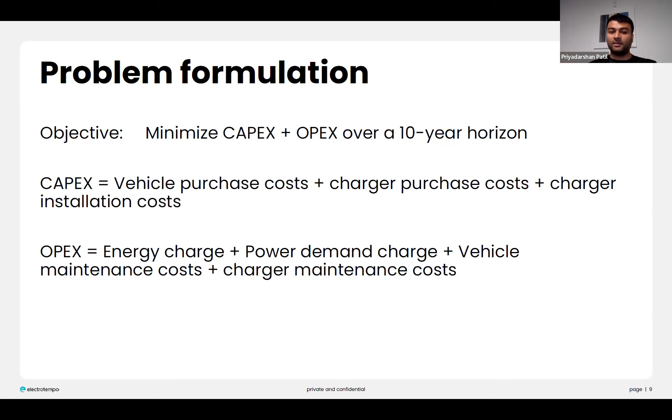Now, talking about the optimization formulation at a specific cost center, we are looking at minimizing capex and opex over a 10 or 12-year horizon, because that's the average lifetime of a vehicle. Capex is vehicle purchase cost, charger purchase cost, charger installation cost, or any kind of equipment that needs to be installed to support these chargers. And opex is your energy charge, power demand charge, vehicle maintenance cost, and charger maintenance costs.

These are some of the constraints. I didn't type out the math, but they want their vehicles to remain within a specified range of charge, or they must charge according to charger charge rates. Vehicles can either be in use, charging, or idle, and can only charge at one charger. Chargers can supply up to their maximum rating, and a few others.

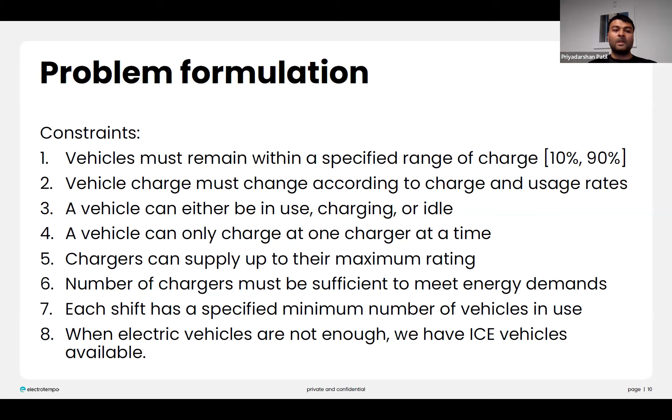Now, where is the complexity? It seems like a straightforward optimization problem. You're just trying to do some vehicle sizing and charger sizing. So for a single terminal, it's pretty easy. However, the complexity comes from having to co-optimize for all the cost centers with their different schedules, with their different charging schedules, with their different requirements.

So that is where traditional solvers, or just throwing a linear program at a traditional solver for all of these cost centers, fails. That is where we have to use techniques such as relaxations for some of the constraints and trying to look at reducing problem sizes or reformulations.

Now, similarly, for on-road vehicles, trucks serve routes that are of varying length and have some time windows for their customers. And we kind of need to identify key routes that can be electrified. Currently, as I said, with the availability of equipment, it's pretty easy, because the only routes that we can electrify are driven by legislation and by availability of equipment. But as more and more equipment becomes available for on-road vehicles, then it will become a more interesting optimization problem.

Now, moving on to our second type of customers, or our second key stakeholder, that's the utility companies. Utility companies are the providers of electricity, and they have 2 main priorities. One, keep the grid stable and healthy. And the second is provide electricity, in that order. They want to care about the grid. If they cannot supply energy in order to keep the grid healthy, that is completely fine. So they need to identify where exactly the demand is originating so that they can target infrastructure accordingly. And yeah, as I said, this is the overview that I just talked about.

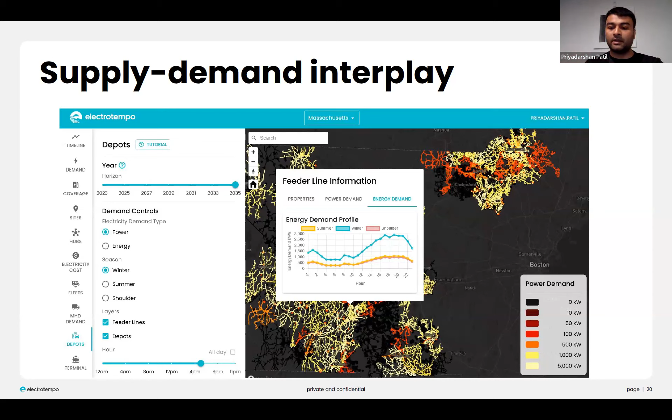That way, utility companies know, okay, the capacity of this specific feeder line is X megawatts, and the pull is Y. Is Y greater than X? Well, then you're in trouble and we need to upgrade. If not, they understand what's the spacing or safety net that they have. So this is one way of helping utilities understand where the demand is in their region and helping them walk through it.

And the last type of customer or stakeholder that I mentioned is site owners. And the biggest question that they have is, where can I install chargers? Think of it as an analog to gas stations, where gas station companies like Shell, BP are like, well, where do we put in gas stations so that we can get maximum demand? And so site owners just want to do that for electric chargers.

Now, think of this as companies like Prologis, Americold, who are massive commercial real estate owners. They have clients like Amazon, Walmart, or even smaller retailers who have trucks. And these retailers are asking, well, if we want to electrify our fleet, can you provide us chargers? And so these companies want to install chargers.

Now, at this point, I think you may be noticing a common theme here. All of these businesses have a lot of information about their domain, but they do not understand transportation. They do not understand traffic patterns. They do not understand what kind of traffic is around them or where is this demand located. And this is the same with this kind of client.

So they have two types of traffic: highway traffic, which is trucks that are passing through and stopping by. And they have local traffic that are box trucks serving the local area. Think of it as like Amazon vans, think of it as like Cortland furniture vans, and so on and so forth. Now, as I said, these clients have their own advanced analytics, but they don't understand traffic patterns.

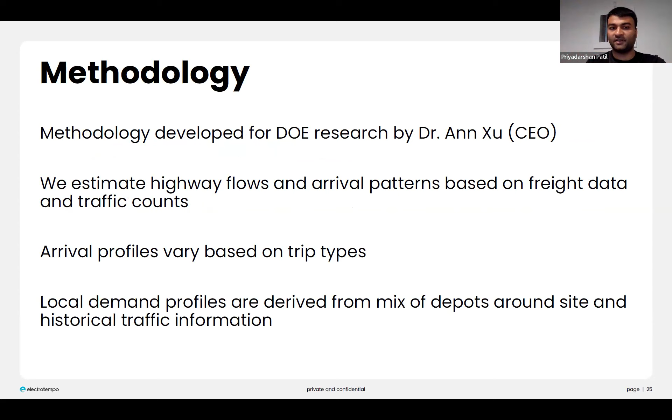Now, the methodology for predicting highway flows, and I'll go over this very quickly, was developed for the Department of Energy by our CEO. And we estimate traffic flows, basically highway flows and arrival patterns based on freight data and traffic counts. And then local demand profiles are derived from the mix of depots around any given site and historical traffic information. So let me just show you, this is one example of how we provide our customers what kind of travel profiles that we have.

So in conclusion, based on what we have seen, electrification is basically currently being driven by legislation, which then goes down to utilities, which then goes down to infrastructure, that is site owners, and then it goes down to fleet owners. Whereas the pull is being driven on the other side in the reverse. That is, fleet owners are asking infrastructure owners, who are asking utilities, who are asking legislation.

Now, all of these stakeholders, these are Fortune 500, Fortune 100 companies in many cases. They know their business, but this is the time when they need to understand traffic or insights about traffic. And there are lots of opportunities for using this traffic data and creative problem solving with just our existing transportation engineering methods. So with that, I'll stop and take questions.

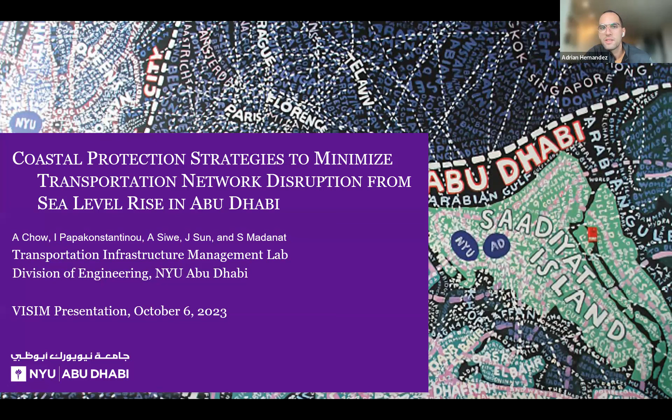Okay, thank you, Adrian. Thank you for inviting me to this talk. The title of the talk here is The Coastal Protection Strategies to Minimize Transportation Network Disruption from Sea Level Rise, using the case study of Abu Dhabi.

I want to just say that I am of a hydrodynamics background, so I am more in tune with the tidal model that I will explain in more detail. However, Ilya Papakonstantinou was really the main traffic modeler in this study.

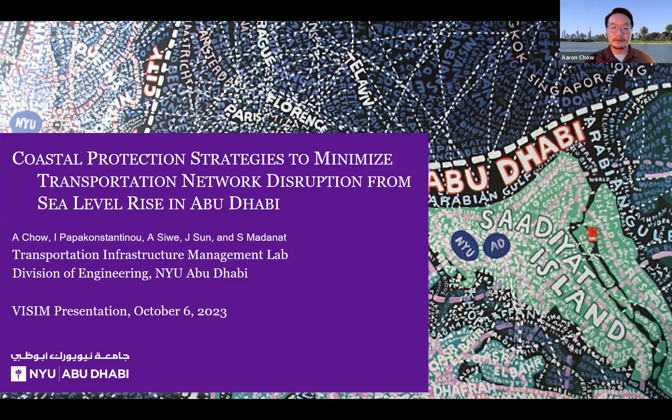With this, the prevalence of what we call nuisance or sunny day flooding is going to happen, whereby even without the storms, you see the high tide going into the coastal areas, and this is going to happen quite a lot more in the foreseeable future.

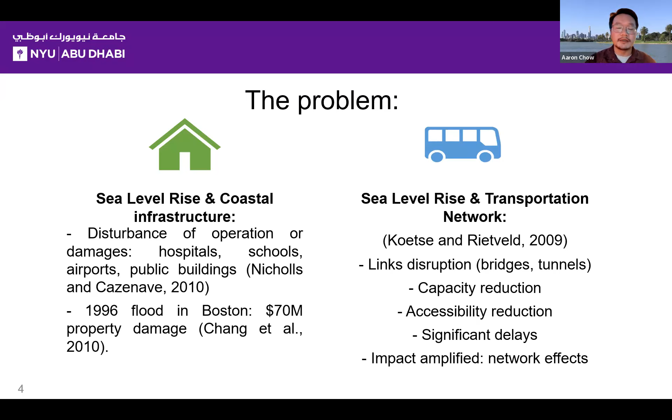So with sea level rise, the coastal infrastructure is the most vulnerable, and there's obviously a lot of disturbance of operation and damages to public buildings and such, causing tens or hundreds of millions of dollars of property damage. And then also for transportation, what happens is that the coastal links will get inundated. Then you have capacity and accessibility reduction, causing significant delays. And these are amplified well inland of a lot of these coastal areas as well.

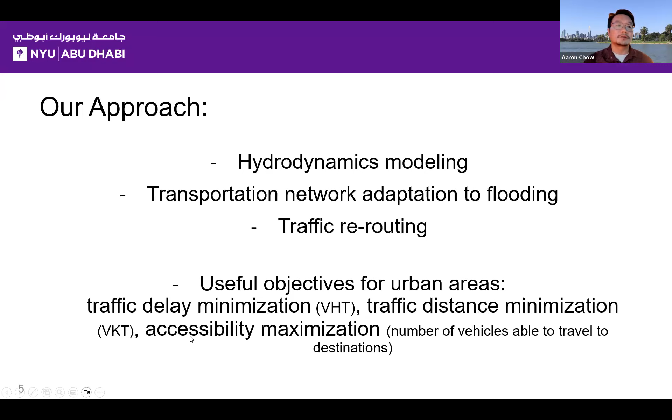So our approach really is combining my expertise, which is hydrodynamics modeling of the coastal inundation, and then we couple that with Ilya's transportation network adaptation using a route choice model, and then we come up with useful objectives for urban planning, seeing what flooded links will cause in terms of traffic delay, and we want to minimize those in terms of how to protect the coastal areas to minimize traffic delay, also minimize traffic distance, and also increase the max accessibility of the commuters.

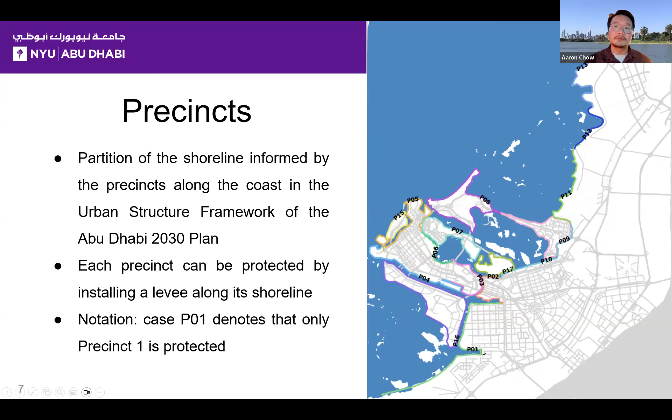What we decided to do is to split the coastline into various precincts based on the 2030 Abu Dhabi urban structure framework plan. And so then we assume that we're going to build levees or some kind of seawall to protect against any flooding in each of these precincts. And we see how each precinct protection affects the other. And so from now on, if I say P01, it means that precinct 1 here is the one that's protected.

So our process now is we're using different hydrodynamic simulation results. We look at what kind of inundation of links will happen for different types of protection scenarios of different precincts, which ones are inundated. That reduces the network that we have in the traffic model, which then changes the traffic assignment and the route choice model. And so now the aim is to identify the combinations of precincts that, when protected, lead to lower congestion levels and also maximize accessibility of the traffic network.

I'm going to explain what my contribution is, the coastal hydrodynamics model. So how do I figure out the peak flooding water level? It's the sum of three different models, actually. The first one is the tidal water levels, which is a Gulf-wide hydrodynamics model that is forced from the oceanographic and climate change data, mainly water level. Then the second is the storm surge, which uses what's called the simulating waves nearshore model, SWAN.

And then finally, you see here the storm surge will add to the tidal level, and then the wave run up, as the waves crash onto the shoreline, you have an increased wave run up. Then this is the maximum extent of your water, and those combined effects give you the peak water level.

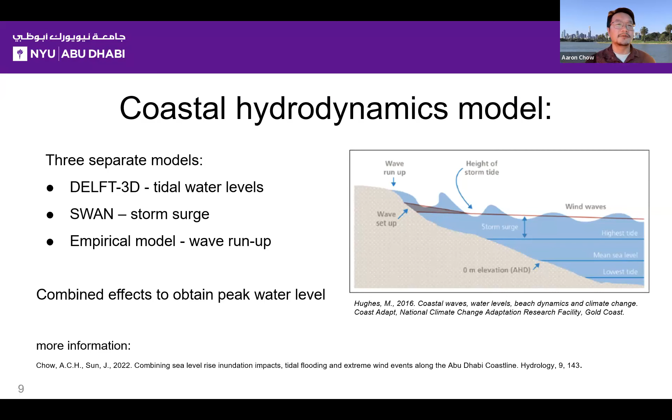0.5 meters sea level rise is kind of the intermediate level of the RCP 8.5 sea level rise that may happen between, I would say, 2050 to 2080, something like that. So that's 0.5. It's well within the observed trend of what will happen. So we put this 0.5 meters up here.

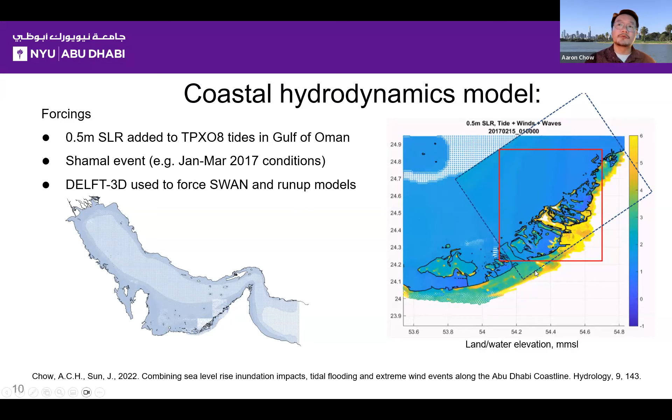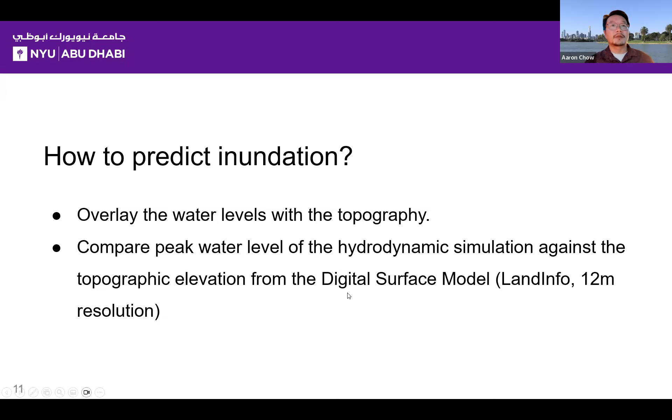So what we've chosen is to model the tidal model plus this high wind event that causes high waves. And so these two models are coupled together, as you can see on the right. And then we get the peak water levels, and we compare that with the land elevation to see which areas are flooded. Like I said here, we overlay the water levels with the topography and compare the peak water levels to figure out where the inundation is happening.

And what happens is I pass this on to Ilya. The traffic simulation, what she does is remove from the network the roads that are flooded, then use the reduced network as the input for the traffic simulation. We are fortunate to have a model that is used by the government here in Abu Dhabi, and it's called STEAM. It's based on Cube, regional strategic simulator.

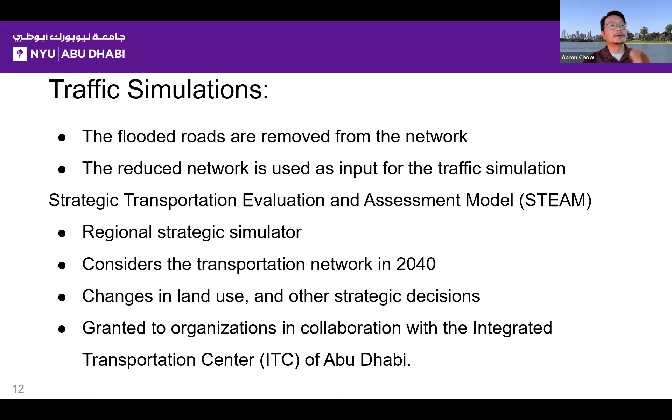It actually takes a transportation network that is anticipated in 2040. So we are using future transport network data. It also has other changes in land use and other strategic decisions coded in for the future. So we're not using past data, we're using projected data for the sea level rise as well as the projected transportation network.

As I mentioned, the different mobility metrics that we want, network-wide values, are VHT and VKT, very useful. Volume to capacity ratio is very useful to visualize congestion along the individual streets. Sorry.

And then to quantify accessibility, we use the number of vehicles in the network. Sometimes in the case of very long commutes, the commuters won't even take the trip, so then they're removed from the network.

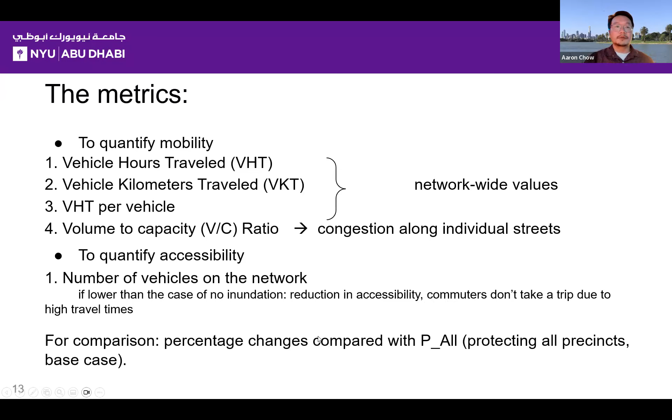Okay, so now I'm just going to show you some traffic model simulation. But before that, an interesting hydrodynamic impact is that actually if you protect the precincts, put walls around one precinct, if you go back to the map earlier, there are many islands which abut each other, and protecting one actually may harm the others. For example, the protection of precinct 1 will increase the inundated area of its neighboring precinct by 22%. So there are some interactions that are quite interesting to see hydrodynamically speaking.

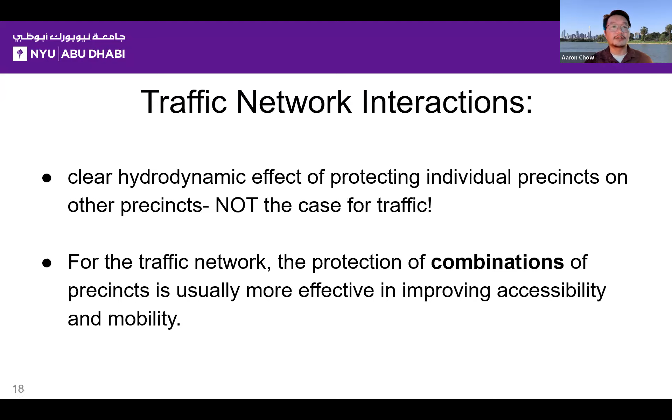Now, there is that clear hydrodynamic effect of protecting the different precincts, but that's not the case for the traffic, because you really have to look at protection of different combinations of precincts, because it really has an effect on what kind of traffic network corridors are affected by each protection scenario. With that, I'm going to show the traffic network modeling.

So here on the left-hand side, you see Abu Dhabi without any seawalls or protection, with the 0.5 sea level rise. These are the peak water levels plotted from the hydrodynamic simulation overlaid onto the traffic network. As you can see, you have a lot of flooded areas. Black links are going to be underwater. Red links are not underwater, however, they are highly congested. The white are links that are still existent and running.

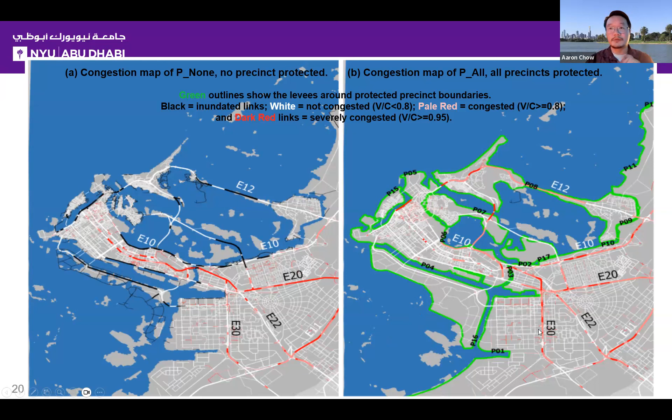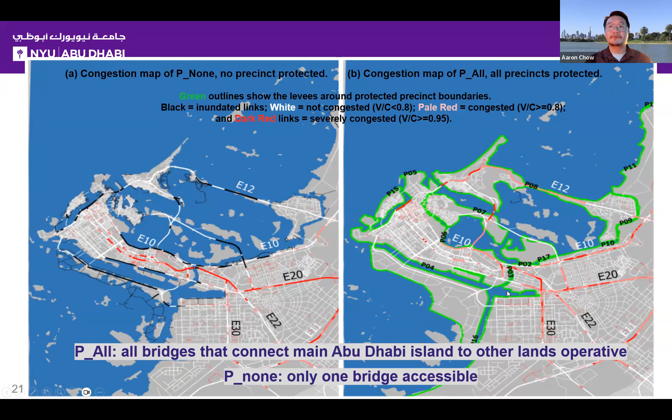And on the right-hand side, we have the case of everything being protected. There are no black links. However, there's a general congestion that you may observe during the commute. This is a morning commute. Here you see all bridges between the different islands are operative on the right-hand side, whereas that's not the case on the left-hand side. Even in the case of all protection, you have this bridge, the Sheikh Zayed bridge, which is red in any case.

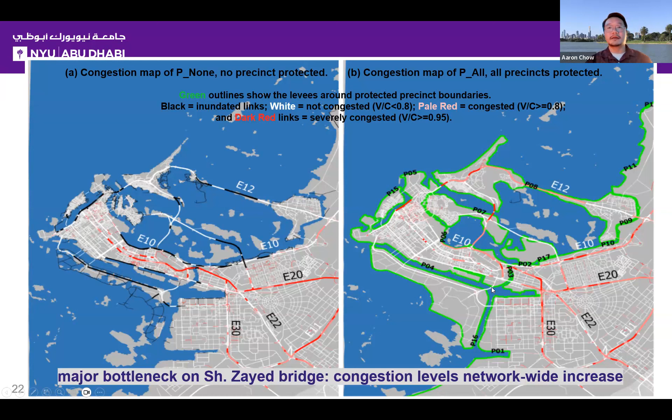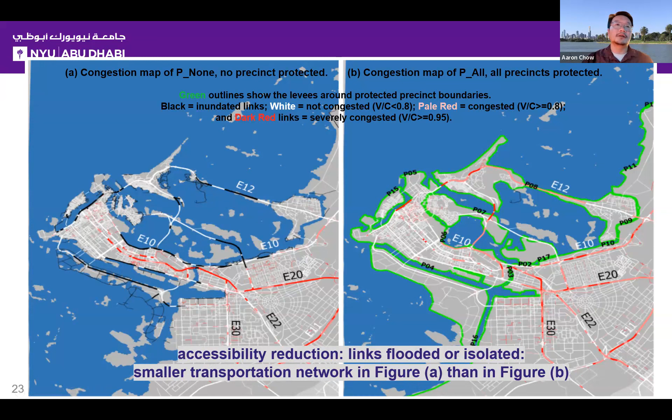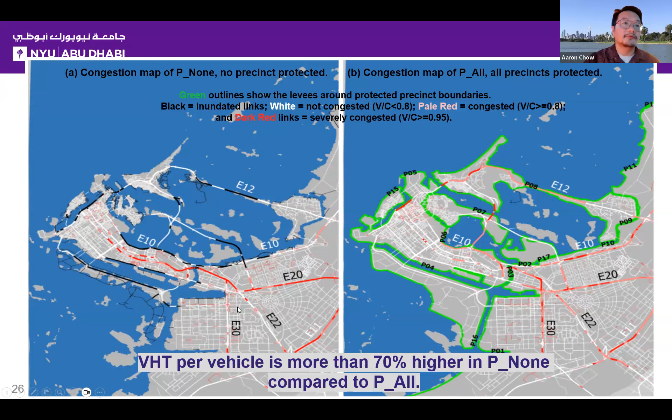On the left-hand side, you have links flooded or isolated, which are in black. Much smaller network in figure (a) on the left than the right. The number of vehicles on the left decreases by about 30%, but the network VHT is higher because you've got a lot of rerouting and congestion. And because of that, VHT per vehicle is more than 70% higher in the case of no protection.

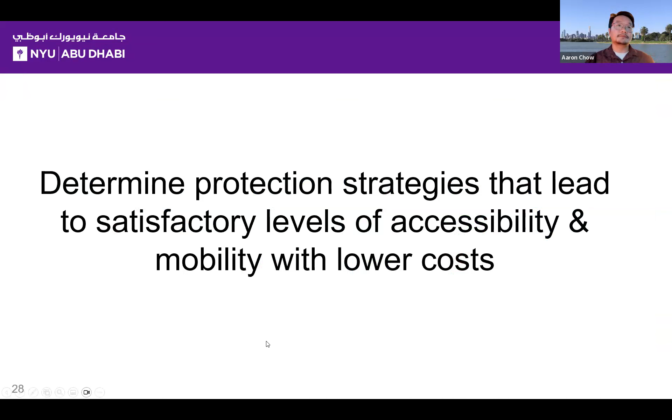Of course, the all-protected case on the right-hand side is the best case, but it's expensive to protect the entire city. So we're trying to figure out a subset of protection strategies that give us the most bang for the buck. We tried different combinations, but for the sake of time, we'll just present a few that are important and illustrative.

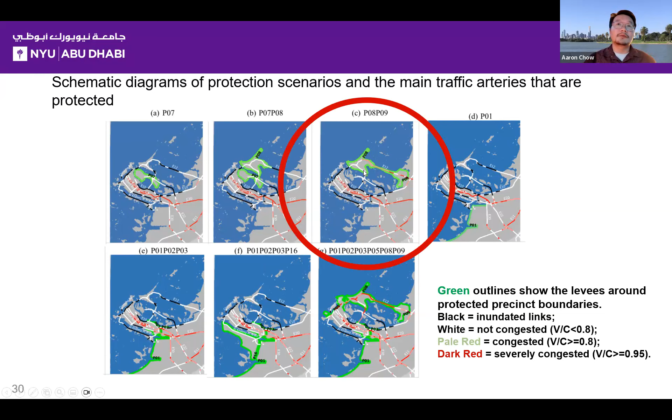This one, for example, is counterintuitive because we're protecting, we're resuming flow. We're zooming into this particular case where we're protecting these two islands. Although the traffic here is resumed, we only have one bridge connecting downtown to the mainland, which is here. And now these people on this island have to make a massive detour just to get into the downtown area.

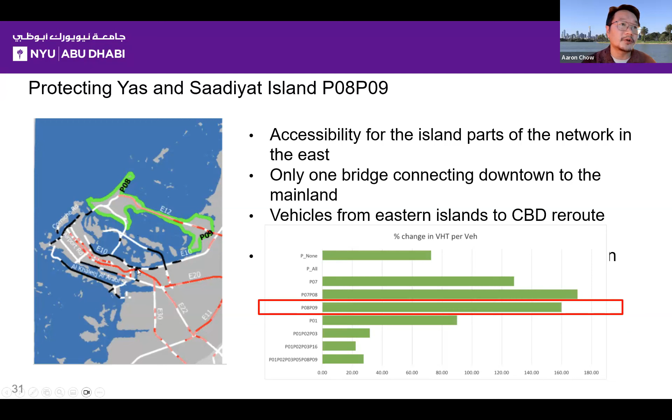So this is an example where protecting this highway and the access to the mainland here will cause the entire network to experience congestion, because you have a huge detour and you're worsening the bottleneck in this bridge.

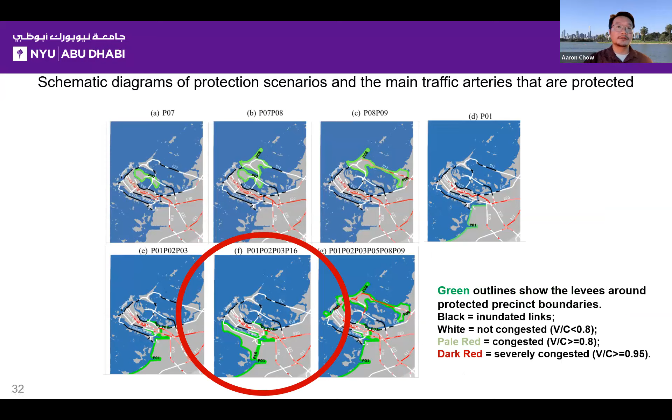Then, for the sake of brevity, I'm going to show you the best scenario, which is the one here, F. In this case, this scenario with these particular precincts protected causes 3 or 4 different bridges to be restored. And this reduces the bottleneck, and it reduces the vehicle hours per vehicle almost back to the level with everything protected.

However, what happens in the previous case is that the vehicle hours traveled per vehicle is the lowest out of all the different protection scenarios, but it's because a lot of the cars are still not back on the network. And in order to make that occur, this is the scenario that we want to use.

This is protecting the northern corridor that travels between these islands to the north of Abu Dhabi island, as well as restoring these links to the mainland. There is an increase in VHT per vehicle, almost down to the case that I showed previously. However, there's a huge improvement.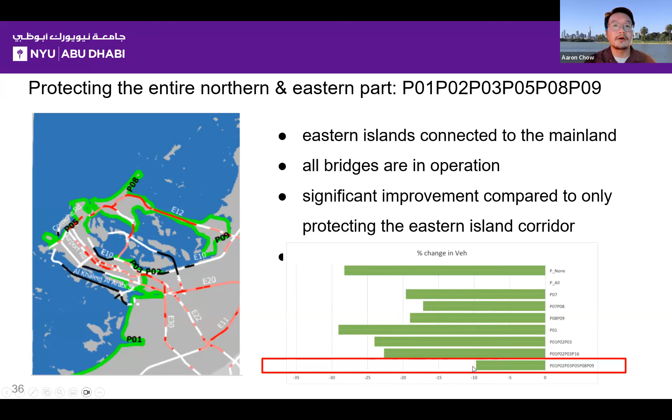Here I talk about the change in vehicles from the worst to the best, from the left to the right here. So the smaller the bar, the better it is; it's closer to the all protected scenario. And this particular protection strategy restores the most number of cars in the network, so a lot more commuters are able to travel again.

And so the conclusion from this study is that it is really critical to protect the approaches to the bridges, to really minimize all these bottlenecks between the island and the mainland. We just really want to minimize the bottlenecks. That really is the main conclusion.

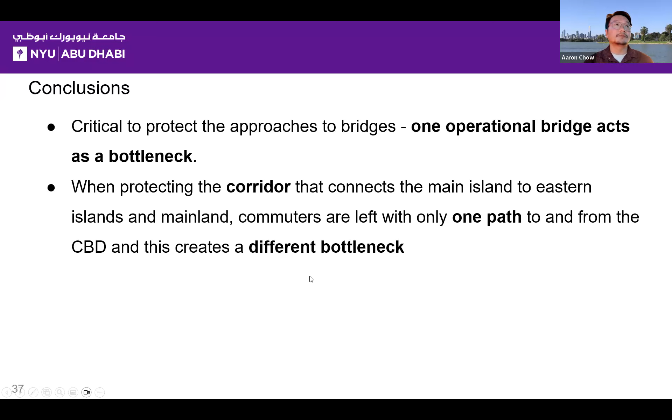We're extending this with the Ministry of Energy and Infrastructure, who are interested in extending this to the federal level. So this can be applied also to the road network of Dubai and other parts of the UAE.

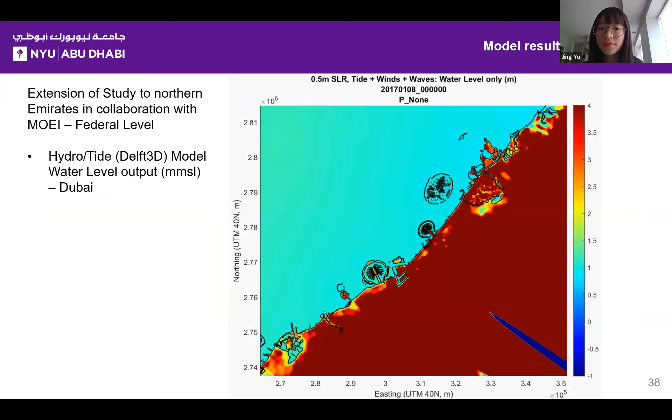That was very interesting. It seems from the graph that you showed that the bridges connecting to the islands are the bottleneck of the whole traffic network if there's flooding. So I wonder if there's a comparison between building more new bridges and protecting the shoreline, and why people didn't consider building more bridges. Yeah, thank you for the question.

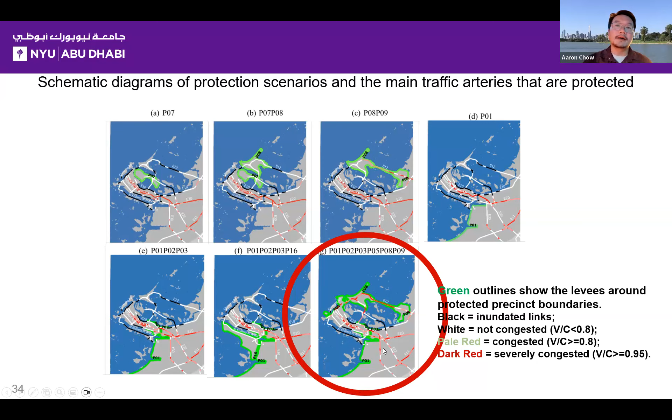The Abu Dhabi Department of Transportation, if you look closer on this map here, this is a good map. If you look on the right-hand side, there's actually already 3 bridges almost trying to be redundant with each other. One was the original bridge, and now they've built 2 more to alleviate this bottleneck. And one of them was lower elevation,

and some of these other bridges are higher elevation. You also see here another newly planned bridge, which doesn't exist right now. It's going to be built. So they have started some of this, but with our modeling we're anticipating that these might not be enough. And so you are correct.

We have to really use this future modeling scenario to inform the planners that you may need more bridges, and much more importance on protecting the bridges and their approaches. Does that answer your question? Yeah, thank you.

So I had a question. Thank you for the presentation again. I thought it was very interesting, and I know that you're more of a hydrology person, but I wonder if you have any ideas as to what looking at the impacts of these different scenarios on either pedestrian activity or transit might look like. I don't know what the transit system in Abu Dhabi is, and I also don't know what the pedestrian areas are, but I wonder what this analysis might look like there.